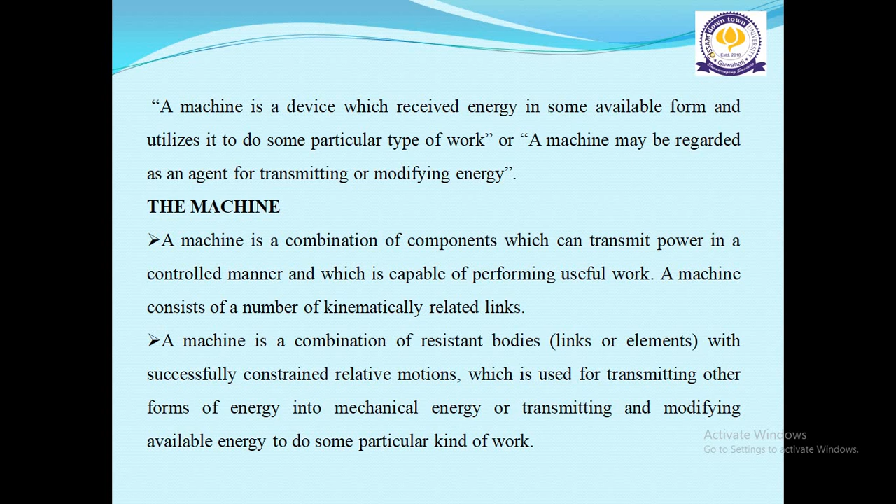So let's have a look. This is the table where you have seen input, machine and output. If you give input like mechanical, electrical, hydraulic, chemical or nuclear, then the machine will be a kinematic arrangement of links like rigid, rigid hydraulic, rigid pneumatic, and output energy will be mechanical, maybe electrical, maybe hydraulic or thermal.

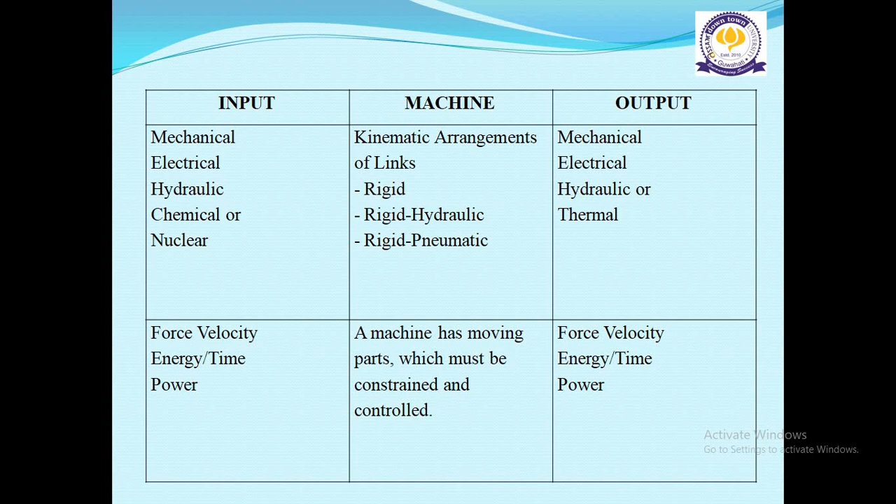Next, if we give input as force, velocity, energy or time, power, a machine has moving parts which must be constrained and controlled. So output will be force, velocity, energy or time, power, which is the same as the input.

Next, machine arrangement. Every machine will be found to consist of a system of parts, that is links or elements. As I have already told, links and elements will be discussed in the coming lectures. Connected together in such a manner that if one be made to move, they all receive a motion, the relation of which to that of the first depends upon the nature of connection, that is joint.

The links may be rigid, rigid hydraulic or rigid pneumatic. The power input may be mechanical, electrical, hydraulic, chemical or nuclear. The power output may be mechanical, electrical, hydraulic or maybe thermal.

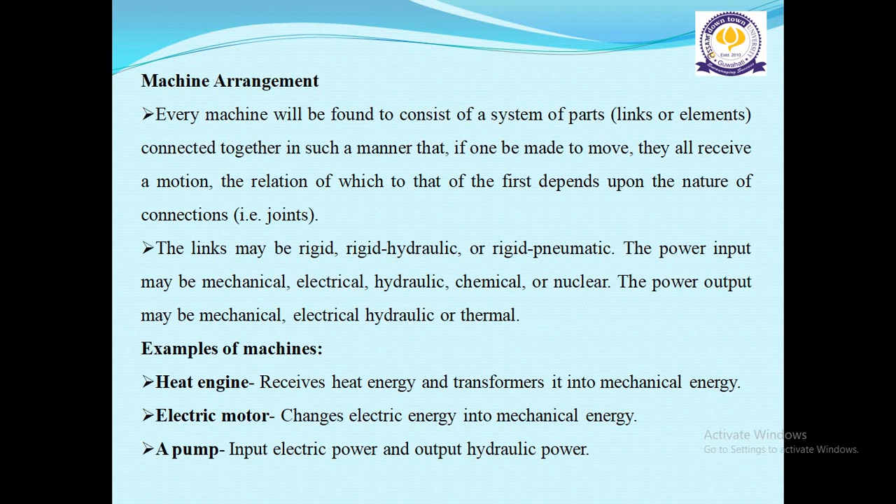So here are some examples of machines. First is the heat engine. A heat engine receives heat energy and transforms it into mechanical energy. Next, electric motor. An electric motor changes electric energy into mechanical energy. Pump. In a pump, input is electrical power and output is hydraulic power. So moving on to the next slide.

The majority of machines receive mechanical energy and modify it so that the energy can be used for doing some specific tasks for which it is designed. Common examples of such machines being hoists, lathes, screw jacks, etc. These machines we have already seen in the workshop. If not, I will show you later.

Note. It should be noted that a machine must be capable of doing useful work. A series of kinematically related links put into motion with no output link and which simply converts input energy to friction heat is not a machine unless the original purpose was only to generate heat.

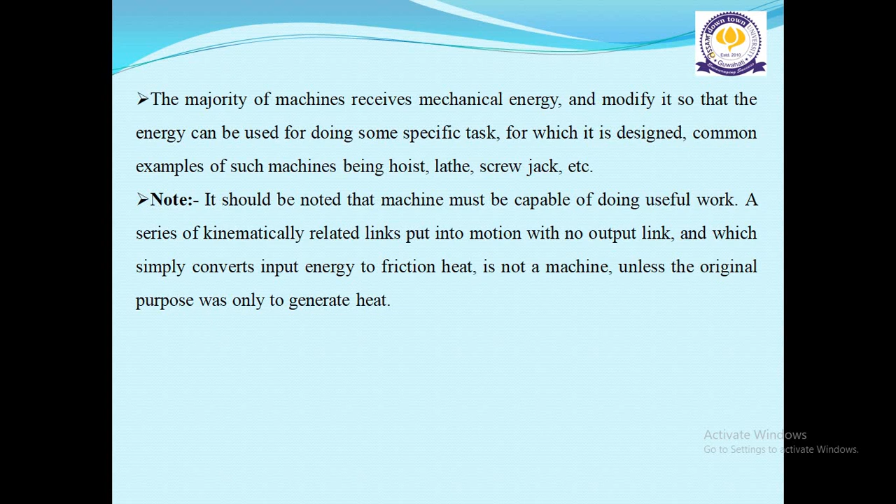Next, we move on to classification of machines. Number 1 is machines for generating mechanical energy that convert other forms of energy into mechanical energy. Examples of this type are steam engines, steam turbines, IC engines, gas turbines, water turbines, etc.

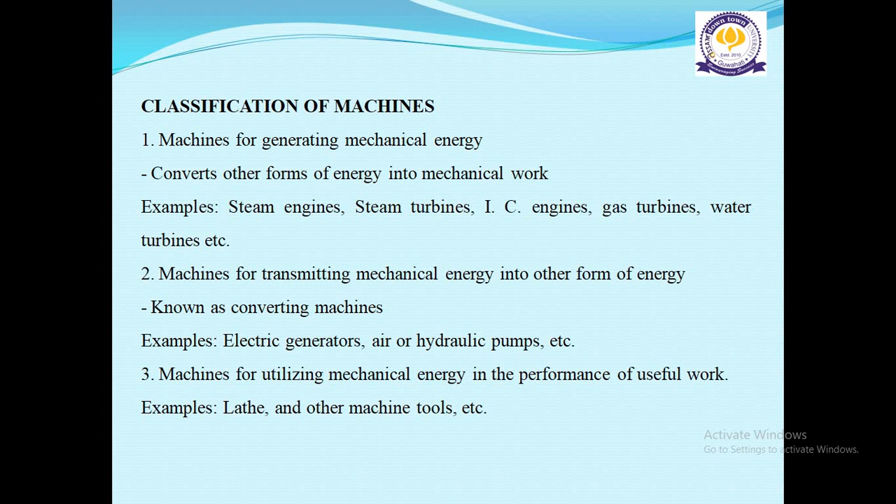Number 2, machines for transforming mechanical energy into other forms of energy, known as converting machines. Examples: electric generators, air pumps, hydraulic pumps, etc. Number 3 is machines for utilizing mechanical energy in the performance of useful work. Example: lathes and other machine tools, etc.

The transmission and modification of energy within the machine require the inclusion of a number of parts, that is links or elements, which are so selected that they will produce the desired motion and carry with safety the forces to which they are subjected, so that the machine can perform its task successfully.

Next, the study of relative motion between the various parts of a machine and the forces which act on them is covered under the field of theory of machines. Or the theory of machines may be defined as that branch of engineering science which deals with the study of relative motion between various elements of a machine and the forces which act on them.

So this particular subject of theory of machines which we are going to learn is a branch of engineering which deals with the study of what? Relative motion of various elements. A machine consists of various elements. So in this course we are going to learn about the relative motions of the elements of a machine.

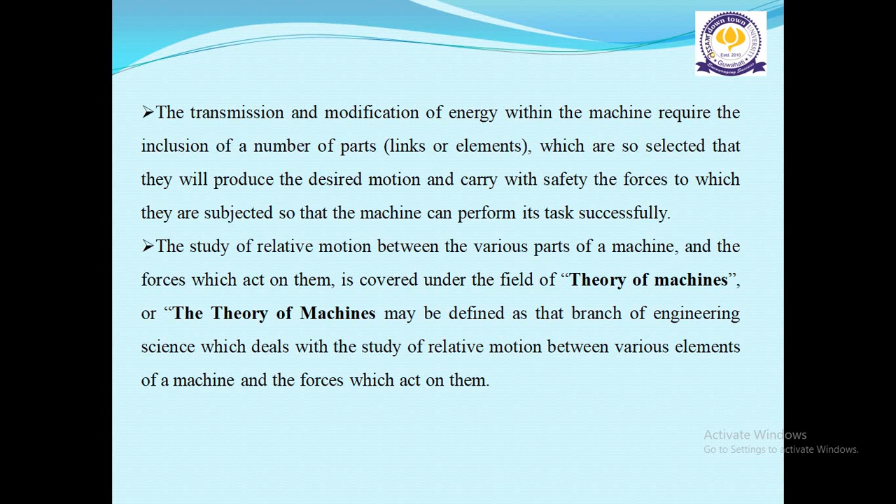Now, what is the difference between machine and mechanism? Machine and mechanism both are different terms. Okay, so here it goes. In kinematics, a mechanism is a means of transmitting, controlling, or constraining relative movement. The central theme for mechanisms is rigid bodies connected together by joints.

It can also be defined as a combination of resistant bodies that are shaped and connected in such a way that they move with definite relative motion with respect to each other. Whereas a machine is a combination of rigid or resistant bodies formed and connected in such a way that they move with definite relative motion with each other and transmit force also.

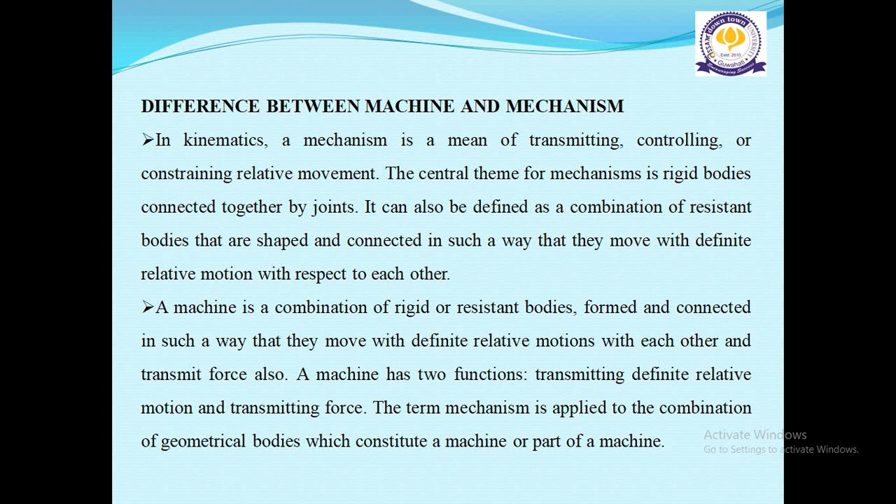A machine has two functions: transmitting definite relative motion and transmitting force. So these two functions are very important for a machine. A machine transmits definite relative motion and also force. They transmit both of them. The term mechanism is applied to the combination of geometrical bodies which constitute a machine or part of a machine.

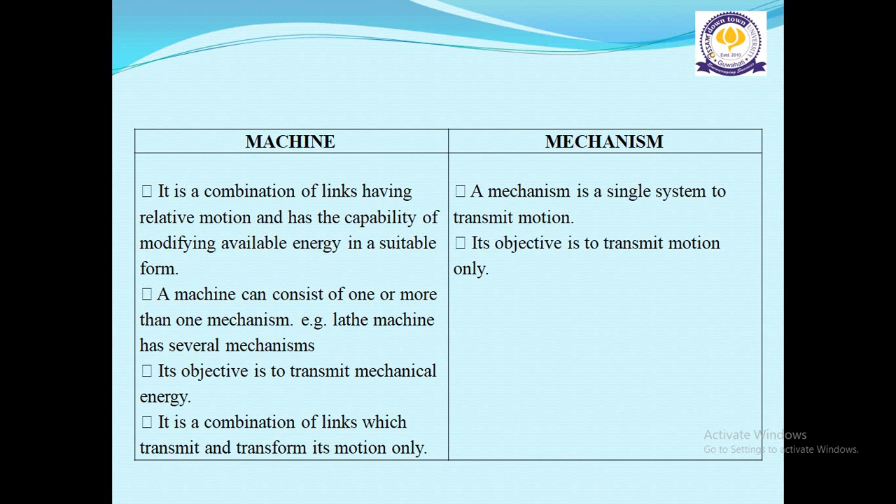Its objective is to transmit mechanical energy, whereas in a mechanism, its objective is to transmit motion only. It is a combination of links which transmit and transform motion only. A simple example of machine and mechanism is the IC engine and the slider-crank mechanism. A slider-crank mechanism converts rotary motion of the crank into sliding motion of the slider, whereas in the IC engine, the same mechanism is used to convert available mechanical energy at the piston into the required torque at the crankshaft.

When you go into details in this course, we will come to learn about the slider-crank mechanism, which I am going to teach you in future lectures. So no need to worry about it right now.

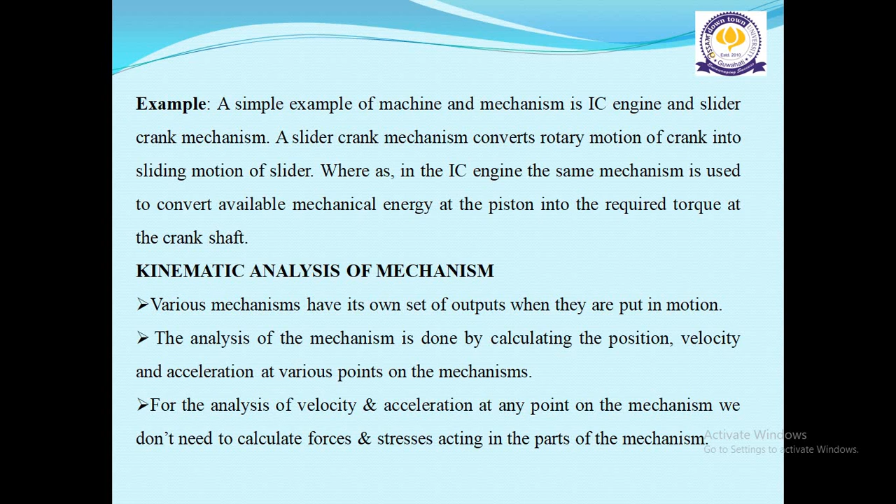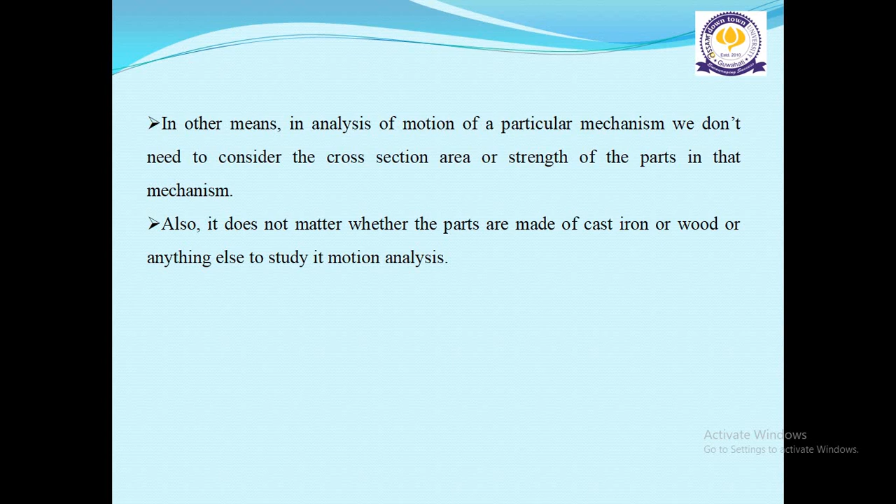Next, synthesis of design. In the design of a mechanism, we will consider stress analysis and other design parameters like bending, etc. to find the dimensions of the parts. The synthesis of a mechanism can be done by following two approaches. In the first approach, the dimensions of the parts in a mechanism are found by considering load, stress and bending, etc. in the different parts of the mechanism.

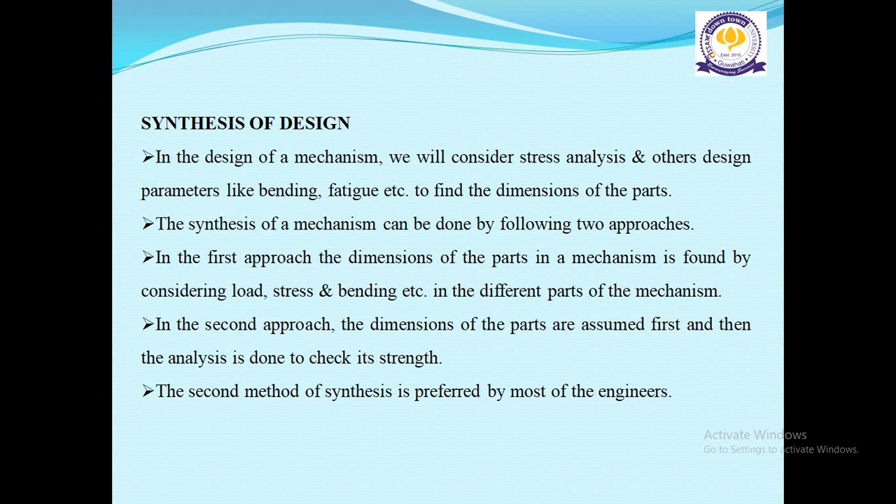In the second approach, the dimensions of the parts are assumed first and then the analysis is done to check its strength. The second method of synthesis is preferred by most engineers.

Next, kinematics of mechanism. It involves the study of the relative motions of various parts of the mechanism without considering the forces producing the motion in the parts. It is the study from the geometric point of view by which we can know the displacement, velocity and acceleration at the various points on the parts of a mechanism.

Next, dynamics of mechanism. It involves the calculation of forces impressed upon various parts of a mechanism. The forces impressed on a mechanism can be divided into statics and kinetics. I guess statics and kinetics you have gone through in engineering mechanics in your previous semesters. So what is statics?

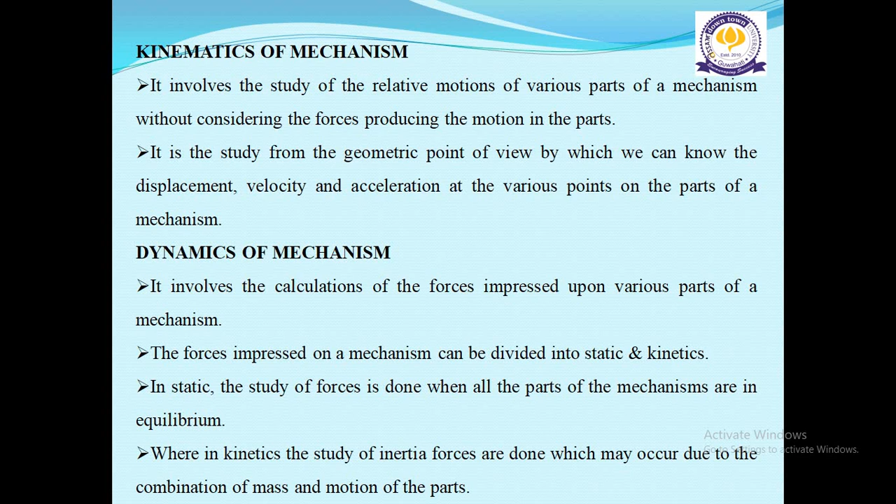In statics, the study of forces is done when all the parts of the mechanism are in equilibrium. Whereas in kinetics, the study of inertial forces is done, which may occur due to the combination of mass and motion of the parts.